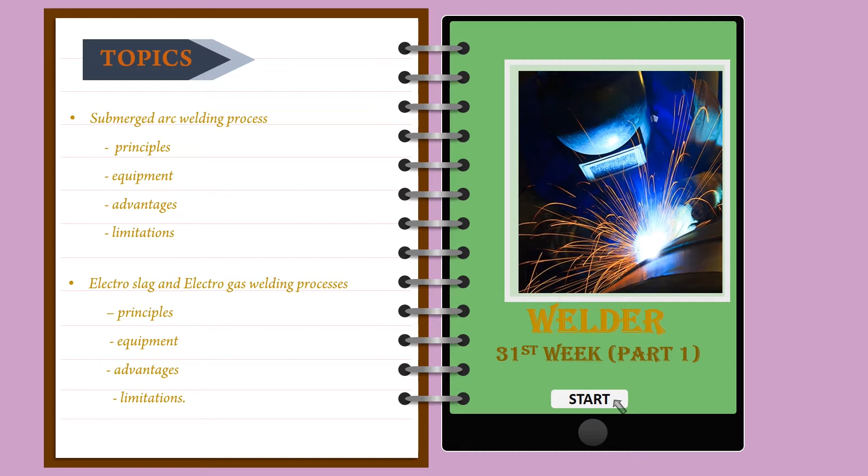Welder 31st Week Part 1. Topics to be covered are submerged arc welding process and its principle, equipment used, advantages, limitations. Second is electroslag and electrogas welding processes, its principle, equipment used, advantages, limitations.

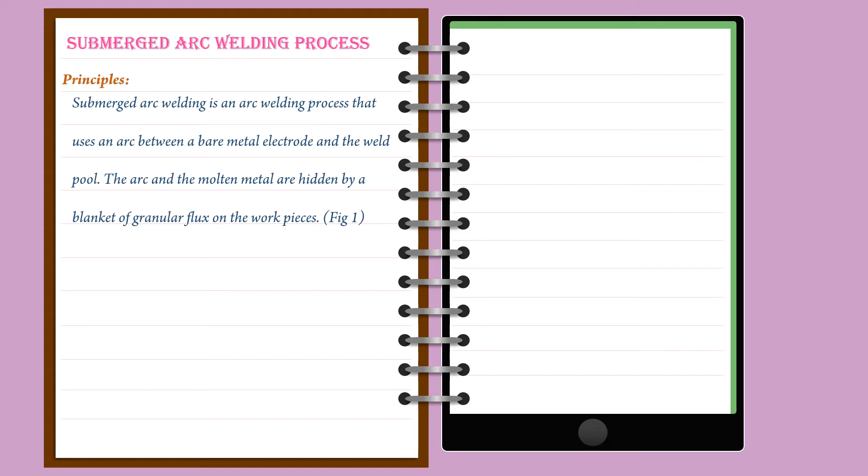Submerged arc welding process. Submerged arc welding principle is given below. Submerged arc welding is an arc welding process that uses an arc between a bare metal electrode and the weld pool. The arc and the molten metal are hidden by a blanket of granular flux on the workpieces, as shown in Figure 1.

Metals which can be welded by submerged arc welding. In submerged arc welding, low and medium carbon steels, low alloy steels, high strength steels, quenched and tempered steel, and stainless steel can be welded.

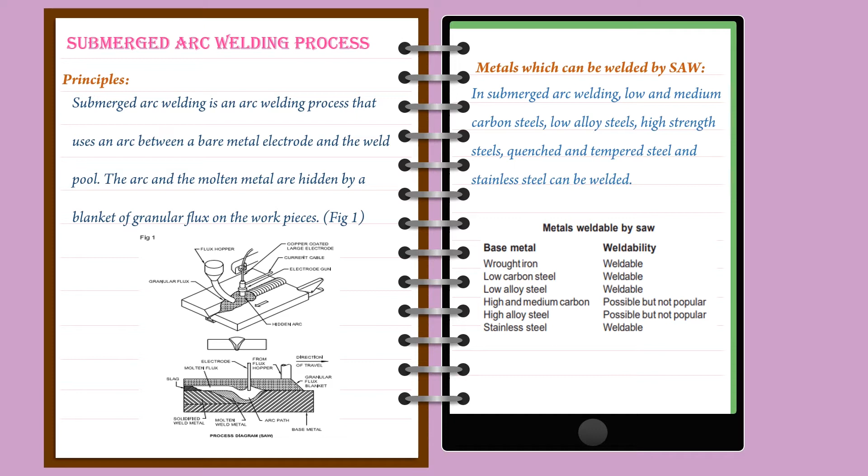Metals weldable by submerged arc welding are wrought iron, low carbon steel, low alloy steel, but high and medium carbon are possible but they are not popular. High alloy steel is also possible but not popular. Stainless steel is weldable.

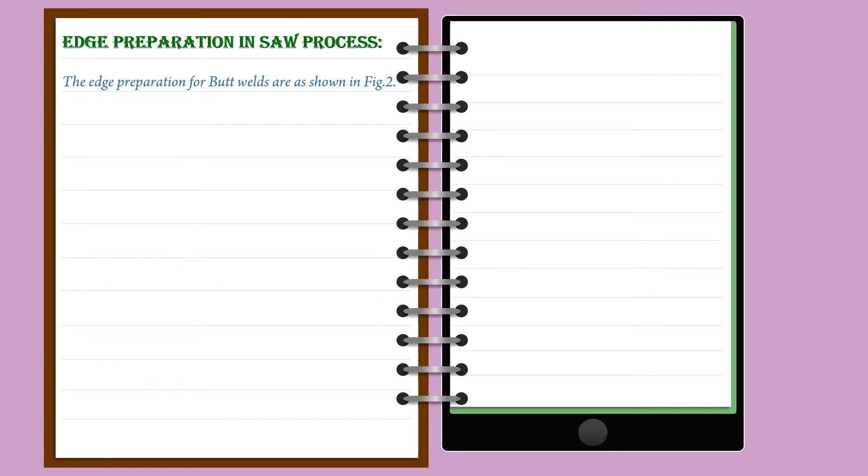Edge preparation in submerged arc process. The edge preparation for butt welds are shown in Figure 2. For plate thicknesses higher than 25 mm, a double V or single U or double U edge preparation is done as shown in Figure 3.

Fillet welds done by submerged arc welding. The T and lap joints shown in Figure 3 are tilted to 45 degrees to weld them in flat position. If the thicknesses of plates are more than 16 mm in T-fillet joint, then the edge of the vertical plate is beveled by 45 degrees and the joint is welded without a root gap.

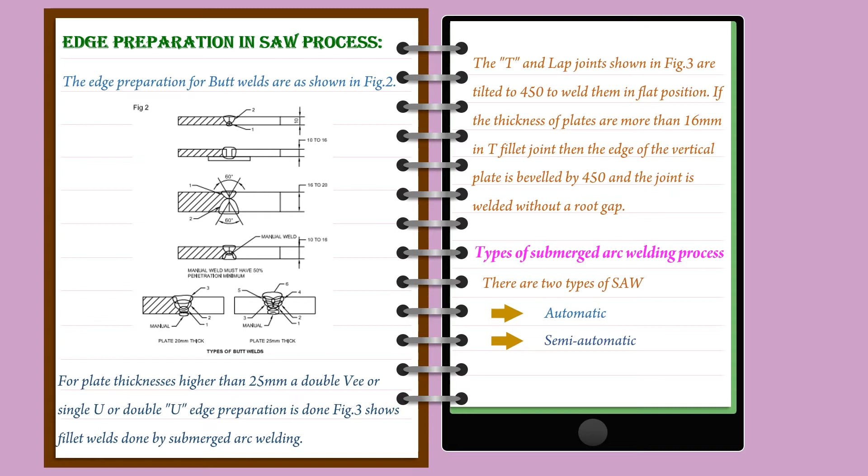Types of submerged arc welding processes. There are two types of submerged arc welding process. Number 1 automatic, second semi-automatic. Automatic submerged arc welding: in this type, arc voltage, arc length, speed of travel and electrode feed are automatically controlled. Semi-automatic submerged arc welding: the arc length, flux feeding and electrode feed are automatic but the speed of travel is controlled by the operator.

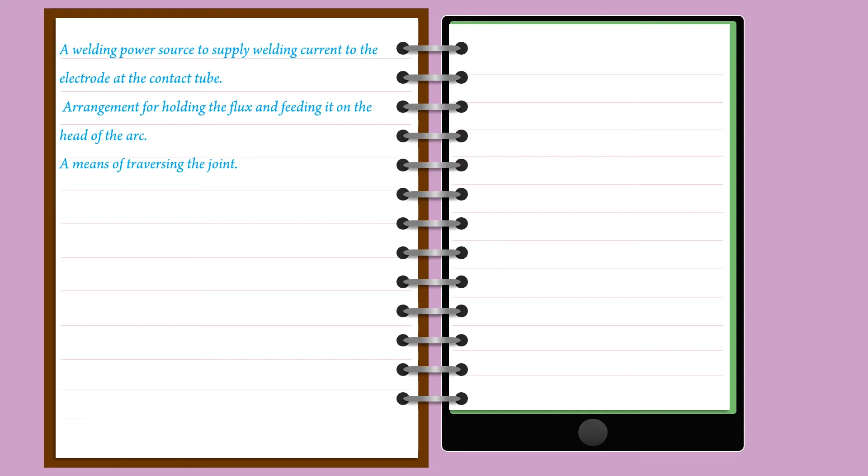Parts of submerged arc welding machine and their functions are shown in Figure 4. A wire feeder to drive the electrode to the work through the contact tube of the welding gun or welding head. A welding power source to supply welding current to the electrode at the contact tube. Arrangement for holding the flux and feeding it on the head of the arc. A means of traversing the joint.

Fluxes. Fluxes used in submerged arc welding are granulated fusible mineral materials which are free from substances capable of producing large amount of gas during welding. Flux when cool is non-conductive but when molten it is highly conductive and allows high current.

Electrode. Bare or lightly copper coated rods or wires are used as electrode in submerged arc welding. These electrodes are available in coil or reel form. Standard reels with diameters 2 to 8 mm are available. Welding procedure for striking the arc. The electrode momentarily contacts the work and is withdrawn slightly.

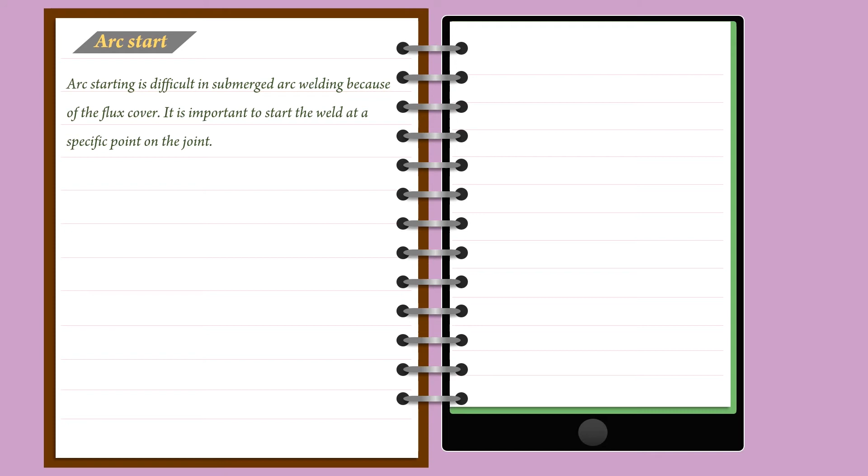Arc start. Arc starting is difficult in submerged arc welding because of the flux cover. It is important to start the weld at a specific point on the joint. Method of starting arc by using steel wool or iron powder. A rolled ball of steel wool 10 mm in diameter is placed at the required spot on the joint and the electrode wire is lowered on to it till it is lightly compressed.

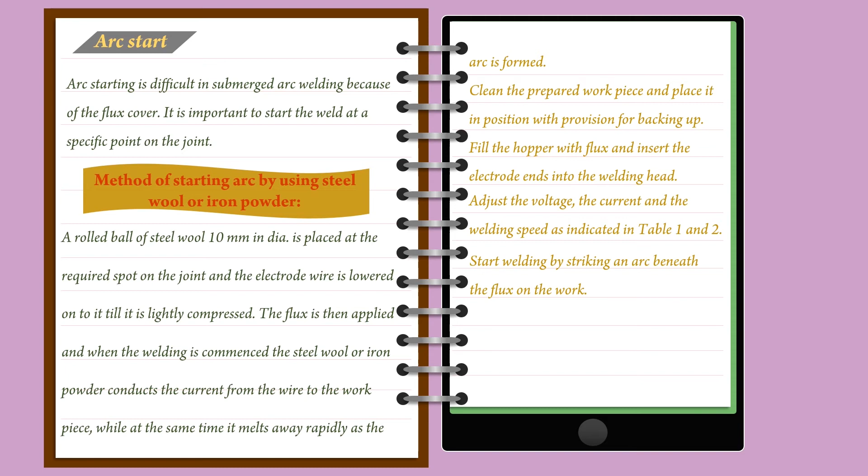The flux is then applied and when the welding is commenced, the steel wool or iron powder conducts the current from the wire to the work and an arc is formed. Clean the prepared workpiece and place it in position with provision for backing up. Fill the hopper with flux and insert the electrode ends into the welding head. Adjust the voltage, current and the welding speed as indicated in Table 1 and Table 2.

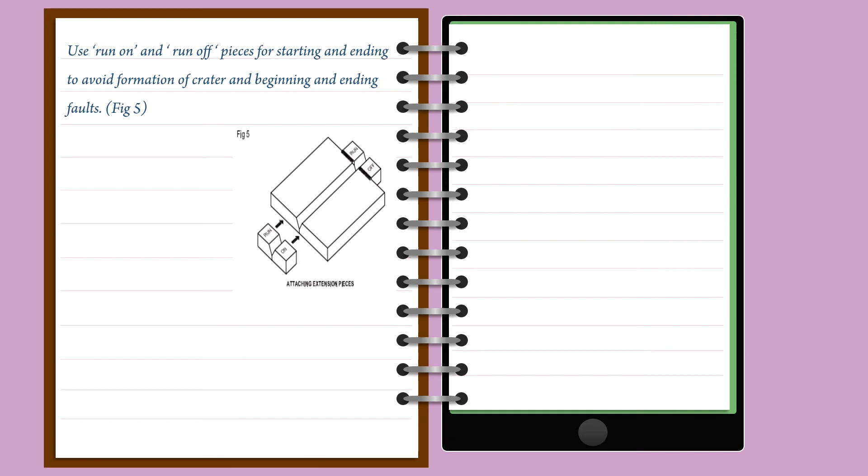Start welding by striking an arc beneath the flux on the work. The entire welding zone is buried under a blanket of flux and longitudinally it travels along the seam. Use run on and run off pieces for starting and ending to avoid formation of crater and beginning and ending faults as shown in figure 5.

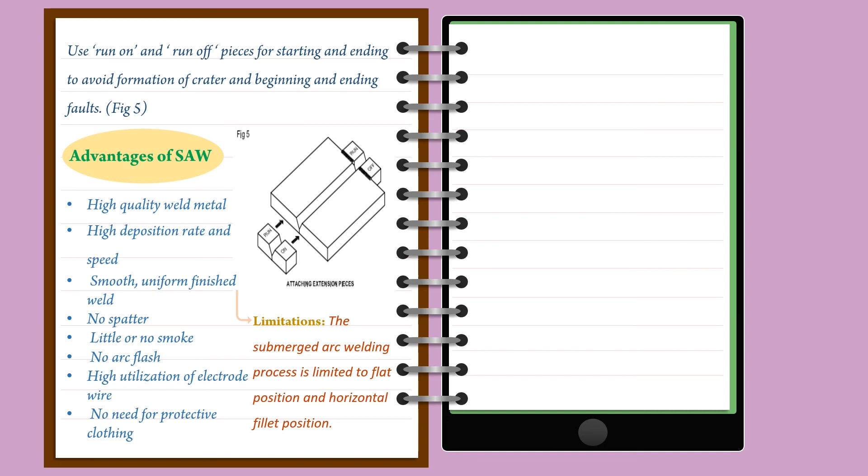Advantages of submerged arc welding: high quality weld metal, high deposition rate and speed, smooth uniform finished weld, no spatter, little or no smoke, no arc flash, high utilization of electrode wire, no need for protective clothing. Limitations: the submerged arc welding process is limited to flat position and horizontal fillet position.

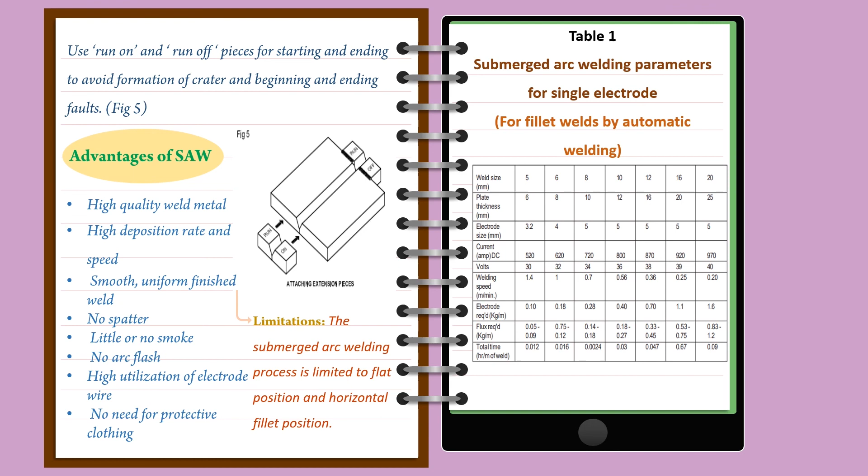Here you can see in table 1 submerged arc welding parameters for single electrode for fillet welds by automatic welding.